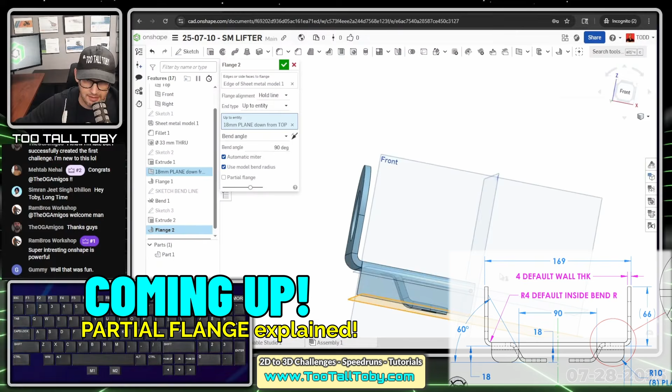And we can pick this 18 millimeter plane, so that way the flange goes right down to that plane. That's pretty sweet to reuse that plane. And then for the length of this thing, we're going to say partial flange. Now, the thing about sheet metal in Onshape with partial flanges is this distance by default is this distance here, which is not what we want.

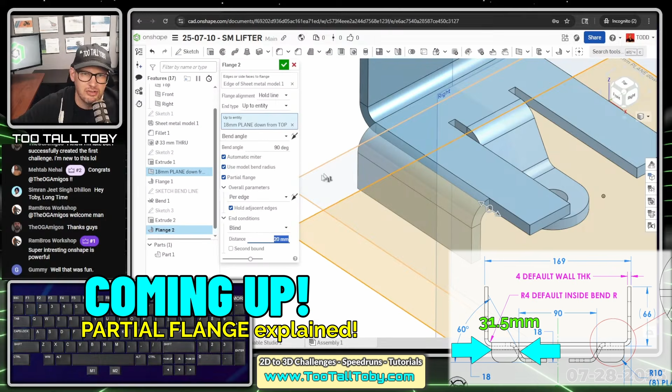So that distance there is 10. You'll see if I change that distance to 15 or 20, it increases off of that edge. So instead, what we want to do is we want to change this to end condition up to entity with offset. And then you just pick this point here where you want your dimension to begin.

So our dimension that's shown on the drawing there is 31.5. So if we make this 10, you can see it's getting bigger, 20, and then 31.5. I only did those increments so you could see what's going on with it. And then remember, in Onshape, you can pick both edges at the same time. So I can also pick this edge over here. So if I come back up.

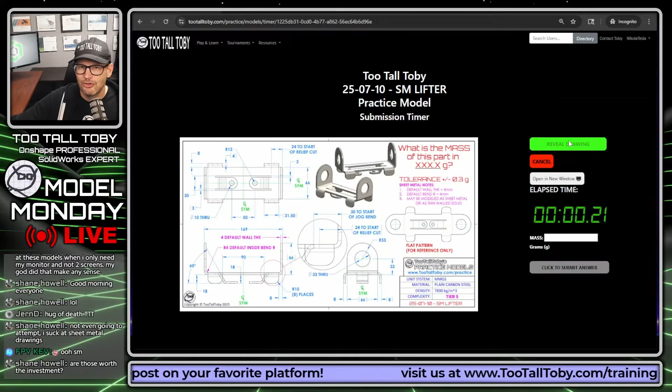So the question is, what is the mass of this part in XXX.X grams? And we're going to try and enter that mass right down here in the Practice Models app so that we can earn a point on the Practice Models leaderboard.

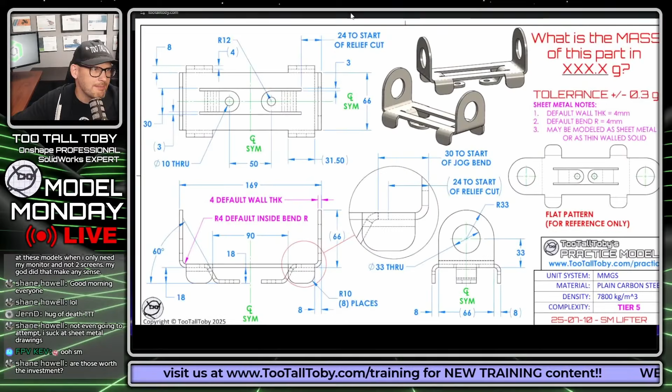So even though the clock is running, what I like to do before I get started in Onshape is I like to come up with a game plan as to how I'm going to model this part. We can see here that this part is a sheet metal model. And when you're working in sheet metal, one of the first things you want to look for is what your very first sketch is going to look like. In sheet metal, we can perform a function called sheet metal extrude.

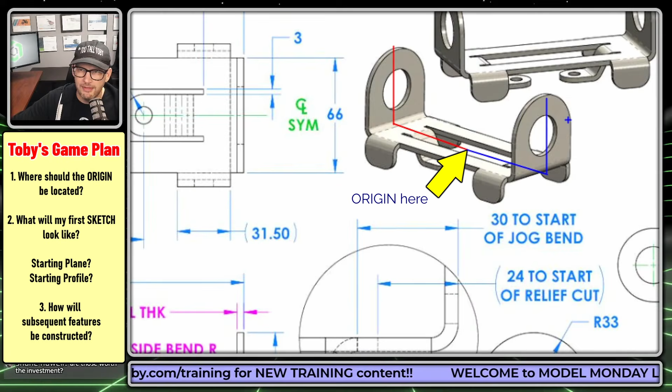So what that means is we could maybe start out with a shape like this, and then we could take that whole shape and extrude it, and then we could fillet off these top corners here. But the thing is, I don't need to do the entire model. I could opt just to do half the model.

So I think my very first sketch is going to be on the front plane. It's going to look like this, and then I'm going to fillet that shape off. I'm just going to do the sheet metal and extrude that out for half the model, and then I'm going to fillet that shape off. Then once I've got that shape filleted off, I'm going to punch this hole through the middle, and then I'm going to get to work on this shape here.

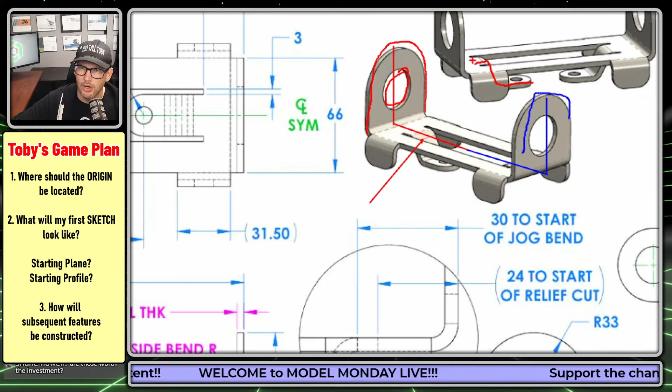There's a tab that comes over and down and over. But before I'm able to get that tab in place, I need to create the clearance for that tab. So there's a little bit of jog clearance, or they call it a relief cut here on the drawing. 24 millimeters to the start of that relief cut.

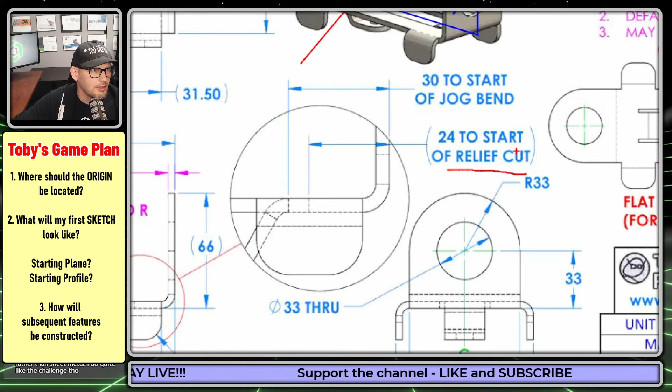Looking down on the top, you could imagine this is like a rectangular shape. But the thing is, the jog itself starts from a different location. You'll notice the relief cut starts at 24 millimeters, but the jog itself begins at 30 millimeters in here.

So maybe when I go to create that cut for the jog, maybe what I'll do is create the cut to look a little more like this. I'll come over, down like this, and then up like this, and come over, so that I begin right away with the starting point at 30 millimeters for that jog, for that flange that's sticking down. And maybe that'll save me the extra step of having to create a sheet metal tab.

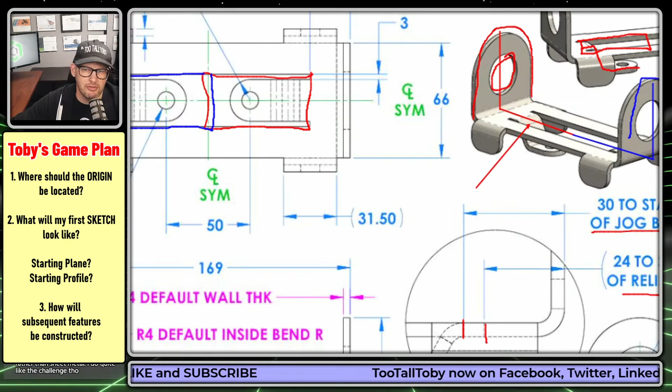Then we get into probably the most complicated part of this design, which is going to be creating this jog that comes down here at 60 degrees and then comes back over at another 60 degrees, or 30 degrees, however you want to say it. So we need to create that jog shape, and it needs to go down to exactly 18 millimeters.

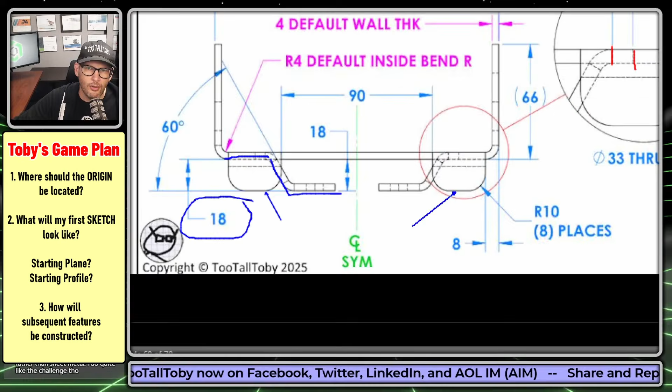I think what I'm going to do is create a plane that comes down 18 millimeters, and that's going to represent the absolute floor, because that's also the bottom of these little tabs here that are sticking out on the side.

And then when it comes to creating these tabs, we'll talk a little bit about Onshape sheet metal and how you can control the length of your flange, and we'll finish up with a super secret shortcut on how to fillet off those corners. So that is our game plan.

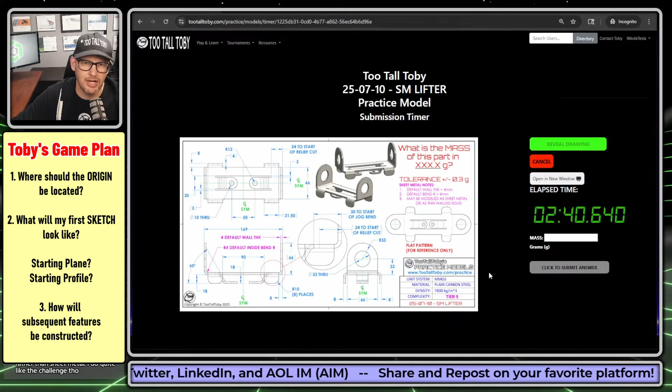So let's move this drawing over to our second screen so that we can model this up and see all of our dimensions. And let's bring up our copy of Onshape here so that we can work in Onshape. And let's bring up our keyboard cam as well, so you guys can see all the cool keyboard shortcuts I'm using.

Now remember, over on the left, we've got some live chat. We've got some people over there in the chat that are also trying to model this thing.

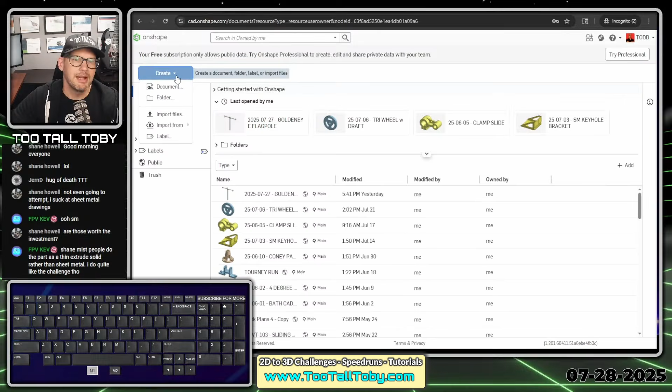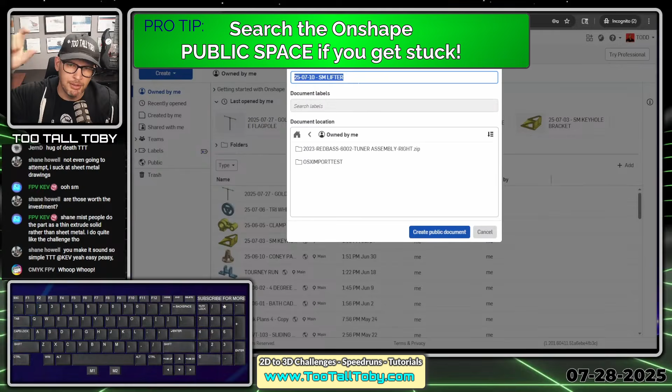I'm going to say create document, and I'm going to name this document 25-07-10 SM lifter. And the thing that's cool about Onshape is that I am going to store this in the public space. So here's the public space, and that means anybody with an account on Onshape can go into that public space and search for this text string, and then open up my model and poke through it in case you're coming up with an incorrect mass.

So I'm going to say create public document, and the first thing I always do is just take a look at my workspace units. Now my default workspace units are millimeters and grams, so I'm pretty confident that I'm in the correct units, but just in case you didn't know how to do it, you do it up here in this hamburger menu.

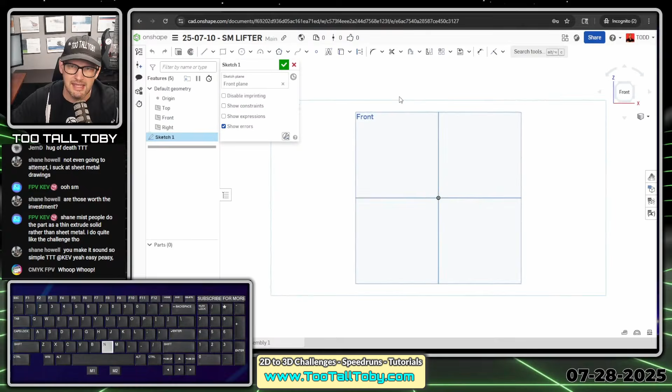So once we set our workspace units, front plane, S key, begin a sketch, N key to get normal to, L key to begin the line command, single click, move my mouse over about 169 over 2, move my mouse up here about 66, and then I'm going to hit escape and press the L key and create a line here, and this line is going to be a construction line.

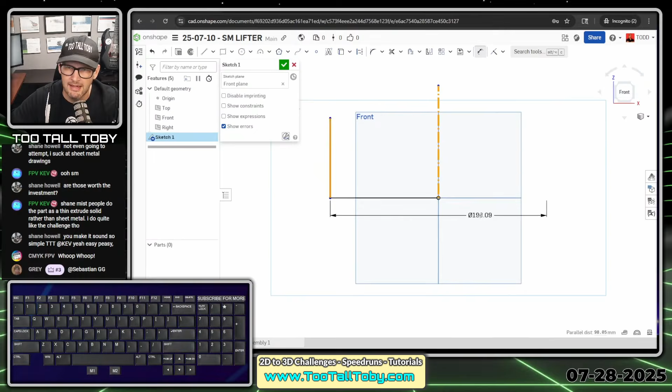What that lets me do is create a dimension here, a key dimension, that goes from this line to this line, and then I can cross over that line and make that distance 169. So even though I'm not doing a revolve, I'm doing a mirror later in the model, this is a great way to get doubled dimensions.

So now for the height of this thing, I could add a dimension here from the base up to this point, and make that height 66 millimeters.

But I thought this would be a great opportunity to just talk to you for a minute about Variable Studio, and you'll see why in just a moment. I don't want to go too in depth on this topic, but I am going to create a Variable Studio here. So I'm going to get rid of that 66.

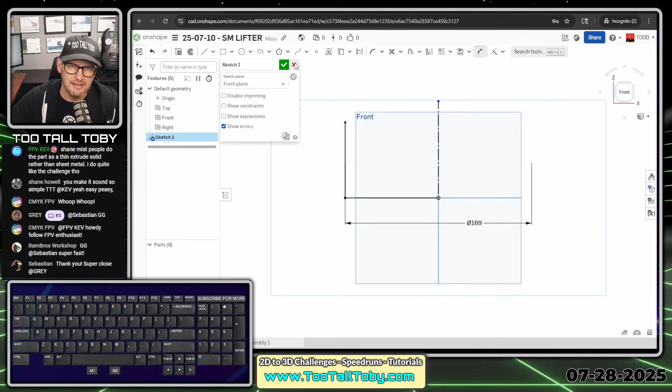I'm going to exit this sketch, and come over here to this panel on the right. Once I click on that panel, I'm going to click down here at the bottom, Insert Variable Studio. This lets me create a dimension like width. I'll call this one width, width of base.

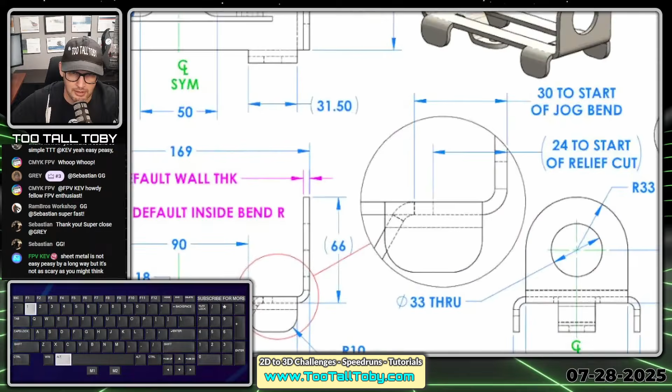And then over here for the length, I'm going to input the width of the base at 66 millimeters. So what that 66 millimeters is, sorry, I misspoke here, what that 66 millimeters is, is this dimension here.

And the reason that's significant is because when I go to create this fillet here, this fillet is going to be 1/2 of this width here. And so by creating a Variable Studio, I can create links like that in my Onshape project.

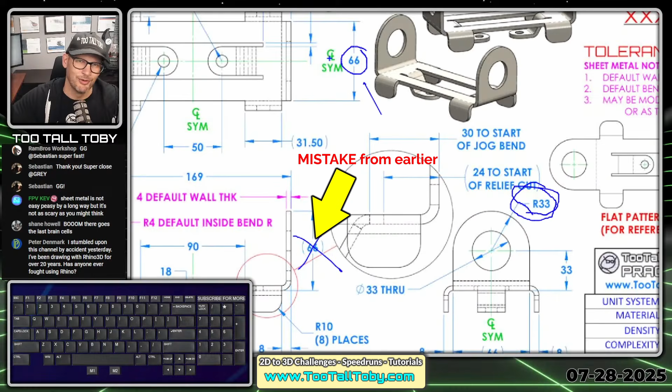I got a little ahead of myself, and I kind of confused this 66 with that 66. Just ignore that. I'll go back in and add that in the sketch here in just a moment.

But we are going to see that when I go to extrude, I'm going to reference that Variable Studio by typing in hashtag width, and then I'll get that width of base. And then when I go to input this dimension here, I'll type in hashtag width, and that one will be over 2. That way, if I ever change the width of this dimension, that fillet will automatically update, and I'll always get 1/2 of that distance.

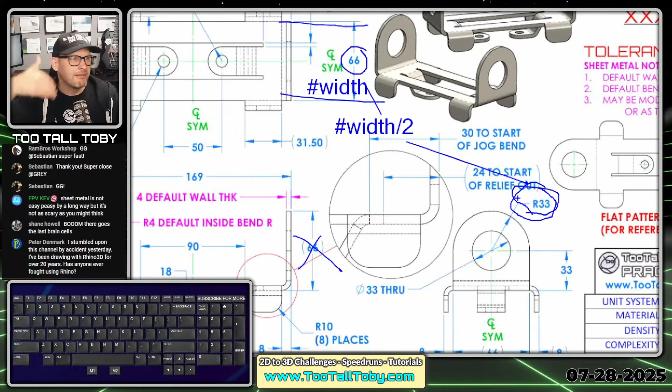Now, I know with a fillet, this could also maybe be a full round fillet, although full round doesn't always work the best in sheet metal. However, there are plenty of applications where you can extrapolate this skill and use it to save yourself some time.

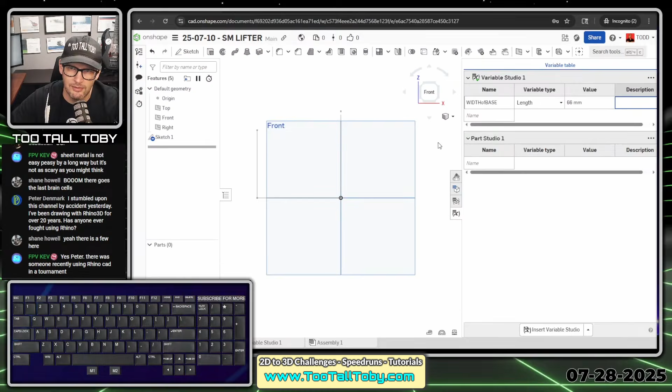So I've gone in here, I clicked Insert Variable Studio. In the Variable Studio, I created this width of base, and I'm just going to call that one length, or that dimension type is length, and the value is 66 here. So now what this means is I can go back into my sketch.

Like I said, this dimension here actually is a static dimension at 66. And now I'm going to go to sheet metal, extrude that. So I hit the green check mark, go to sheet metal model, and then this is going to be extrude.

And I'll pick on this line and this line. And then here for the depth, this is going to be hashtag width of base. So I can just press down and then press enter. And now that's going to become 66 for the width of the base. And I'm going to say that's going to be symmetric.

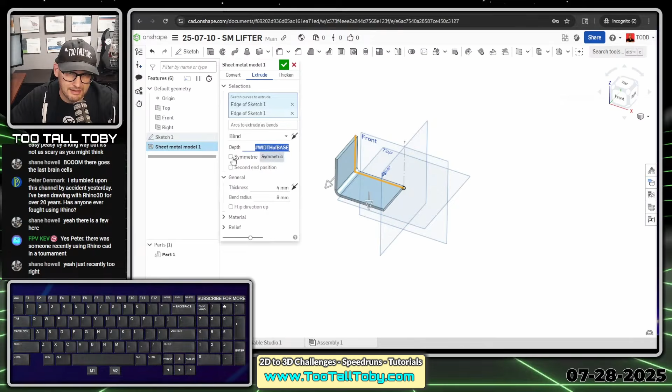And then I can press tab, get down here to my thickness 4, tab, get down here to my bend radius 4. That's shown on the drawing here. So note, default wall thickness 4, default bend radius 4, maybe modeled as sheet metal or as a thin walled solid. So we're going to do it as sheet metal, right? Because we're sheet metal pros here in Onshape.

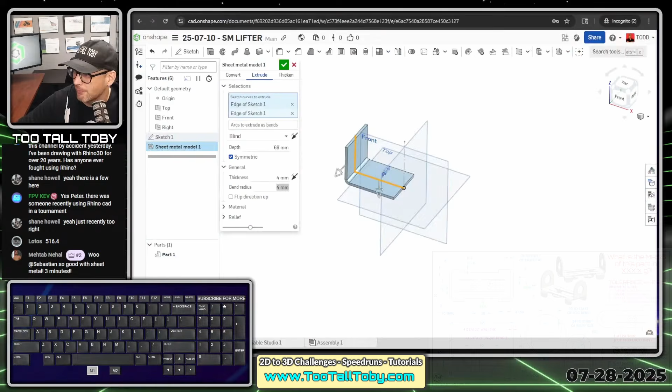So now that we've got our sheet metal parameters in here, the one thing I want you to note is I use tab a lot. I press the tab key to get to symmetric, press the space bar to activate symmetric, tab, get down to my thickness, press 4, tab, get down to bend radius, press 4. Awesome time saver in Onshape.

And then the final thing when it comes to sheet metal is you just got to make sure that your material is going to the correct side.

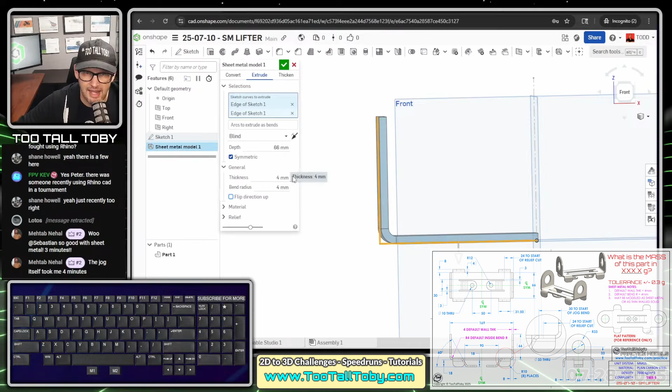So you'll notice here that I've got my direction of my sheet metal material. Make sure that that's going to the correct side. In this case, it's going to the inside because of how I dimensioned this dimension here at 169, and because of how that dimension is on the drawing. So we hit the green check mark and boom, there is our sheet metal.

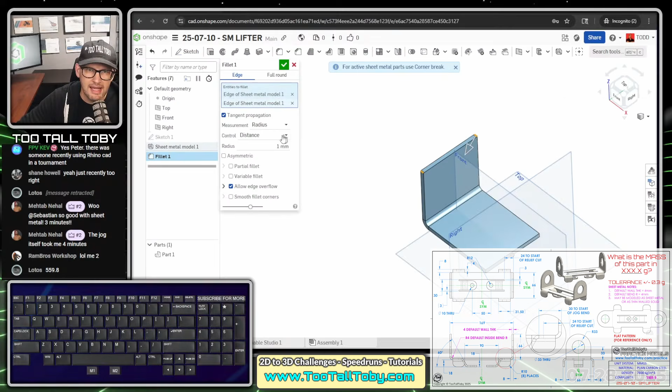Now we can do S key, fillet, and pick on this corner here and this corner here. Then for the radius of the fillet, we can type in hashtag width of base, enter, divide by 2, enter. Look at that, nice full round fillet based on the width of that extrusion. That is how you use a variable studio. So I can press enter there and boom, we are done with that full round running around the top of that part.

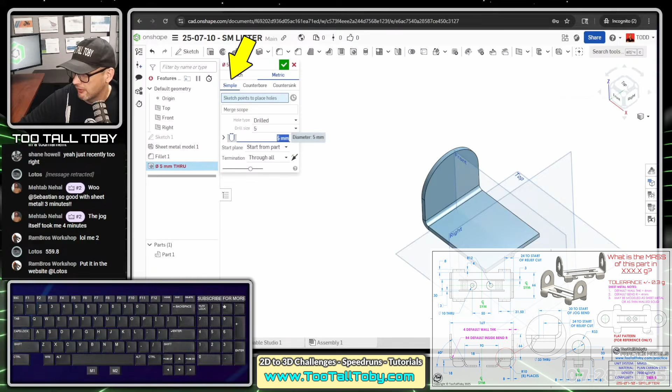Now we can go into the hole command and say we want a simple hole with a diameter of 33. Yep, 33. Then you can see here that we can align that hole using the select mate connectors option. So you click here, select mate connectors, and then you just kind of put your mouse near this edge and it'll wake up the center point of that edge. If you just get near that edge there, so there we go, and click, and look at that, there is our hole. Hit the green check mark, boom, we are done with that feature.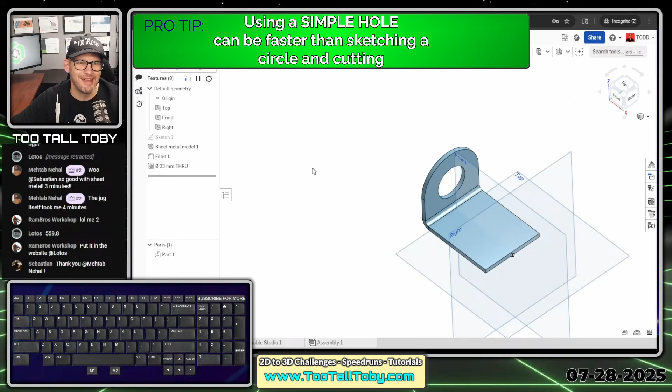So now we can click on this face here, S key, begin a sketch, and we're going to create that kind of rectangular cutout for our jog relief. So S key, rectangle, and we can create a rectangle here like so.

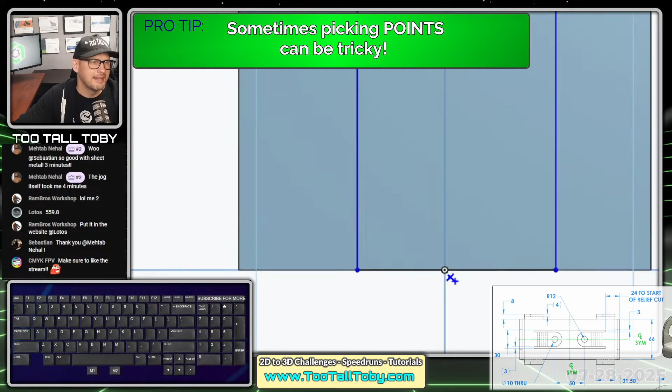Then we can say that this point here, the origin - I notice when you're trying to pick the origin, I usually hover right about here, so you notice I'm kind of down and to the right of the origin. If you put it right over the origin, a lot of times you don't get it - you get the line or the plane or whatever. But if you go just a little down and to the right, then you can left click and pick the origin, pick this, pick the line of the rectangle you want, and then Shift M, boom, midpoint.

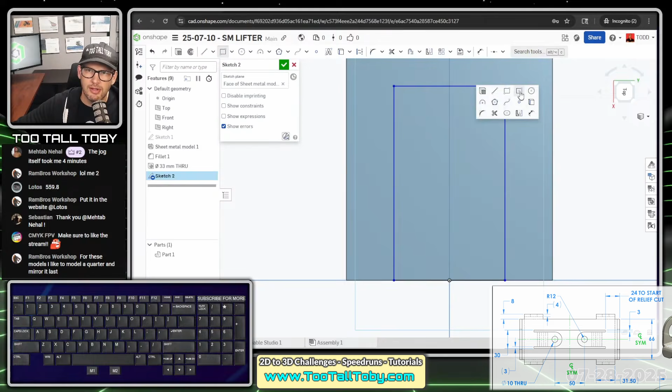Then what we could do is sketch a rectangle here. There's a couple ways we could do this rectangle. I'll probably just do it with a center point rectangle so I can get the vertical relationship here. So we create a rectangle here like so. Now that rectangle is going to basically have symmetry, both rectangles are going to have symmetry relative to one another and relative to the part. So you'll see if you hit escape and then grab this one, it behaves symmetrically, and this one behaves symmetrically as well.

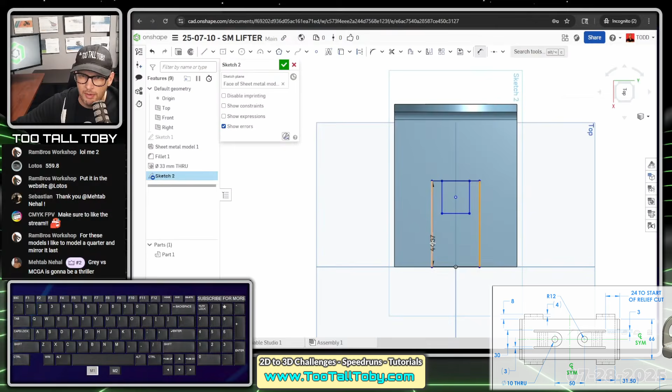So that sets us up to add in our final dimension. S key dimension, the width of that slot is 30. The width here to the clearance is 3, and that should get it for both of them. The location to the cut is going to be our first dimension, which is the 24 location to the cut relief. And the location to the beginning of the jog is going to be our second dimension here, which is going to be our 30.

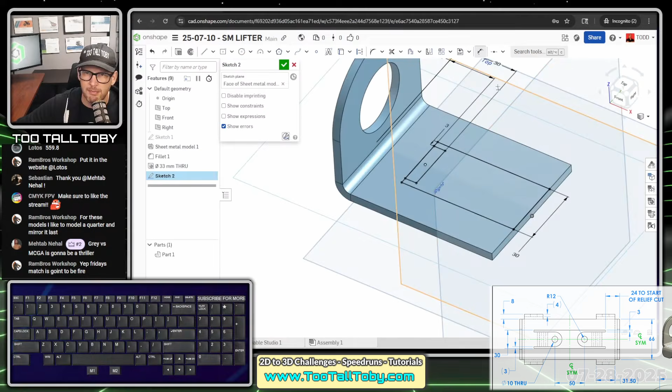So once we create that geometry, we're ready to jump into an extrude cut. S key extrude - oh sorry, let me go back to my top view. This is what that sketch should look like if you're following along with the tutorial. I kind of changed that view pretty quick. This is probably what you want that sketch to look like if you're following along.

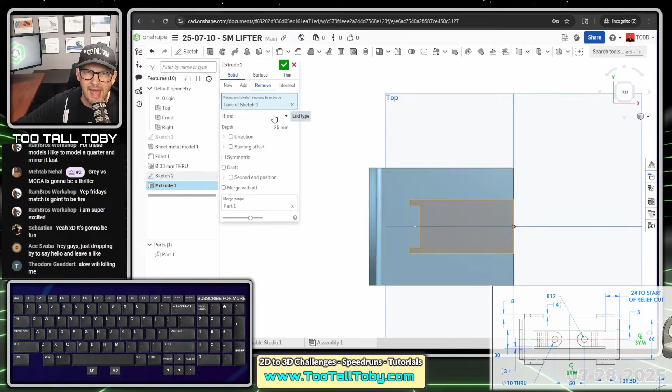So now you can see that I can go into S key extrude, and this is going to be an extrude cut. I'll hit the space bar to clear my selections, then just pick this region here, and that is going to be either up to next or through all. Either one will work - I usually just do through all if there's nothing behind it. So that gives you a great start for your jog that's going to end up coming down. Now, both the jog that's coming down and the tab that are sticking out here, both of them kind of go to this absolute floor location at 18 millimeters.

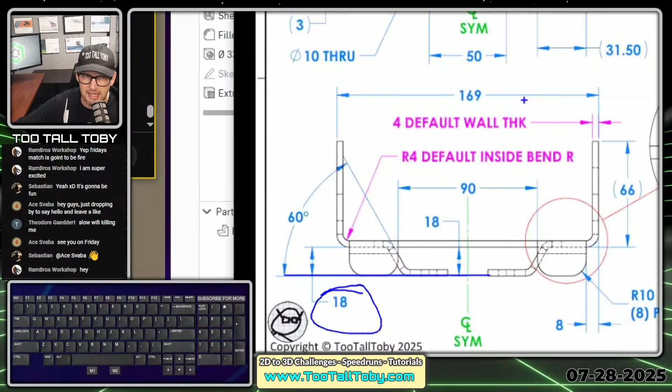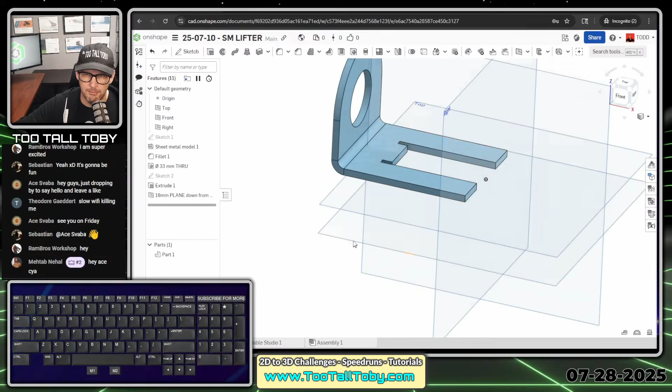So I think what I'm going to do here is create a new plane at 18 millimeters down from the top plane. I'll click on the top plane, press S key for plane, then tab 18, enter, and flip the direction of that plane so it's going down, enter. I could call this one either absolute floor, shift N, or 18 millimeters plane down from top. Either one will work, but now I know that plane is important. So there we go, we can see what that plane looks like.

Now to create our jog, we could do it in two ways, and I'm going to show you both because I think they're both valid. The first one is I could take this edge here, go to sheet metal, then flange, and bring a flange down. Let's make the angle first, so I'll make the angle 60. Then I'll bring that flange down to a distance of up to entity, and you'll notice I'm going to pick on this plane.

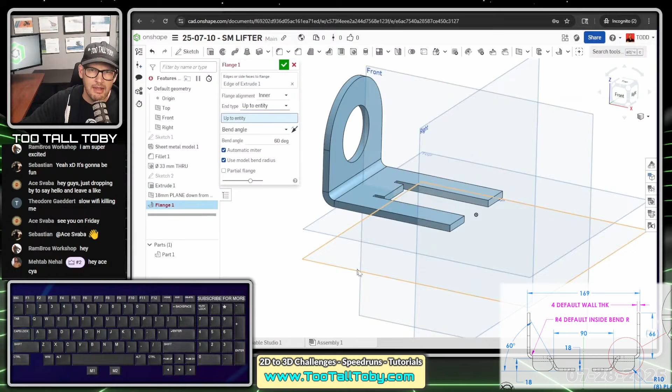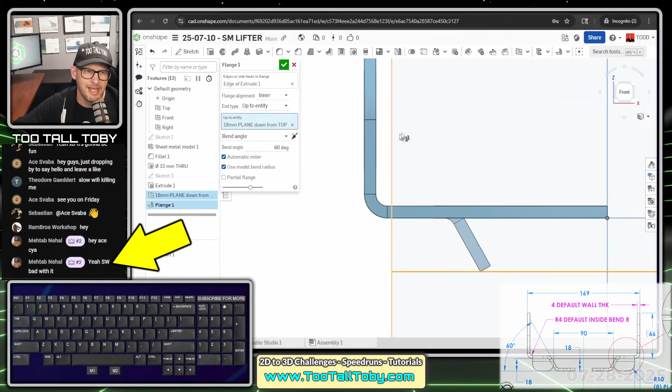This is something, especially for you SolidWorks users out there, that does not work well in SolidWorks. When you have a sheet metal flange going at an angle and then try to reference it to something else, SolidWorks always seems to struggle with getting the length correct. It's almost like it calculates the projected length, but not the length on an angle. But you'll notice Onshape has no problem, it just comes right up to that plane the way you would expect. Mehtab in the chat says yeah, SolidWorks is bad with that. Yeah, I've had to come up with many workarounds to get that to work in SolidWorks. I just wanted to point that out for all the Onshape users and SolidWorks users that are maybe getting ready to switch over.

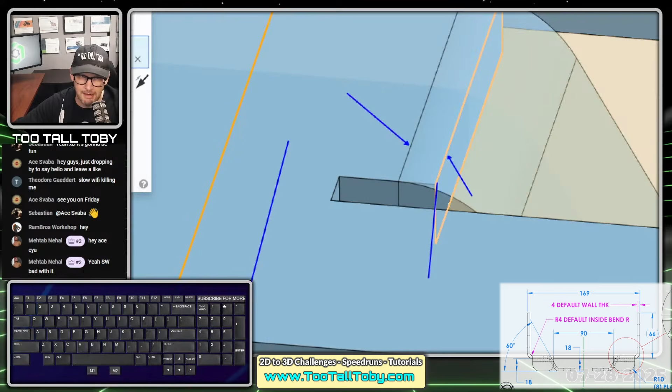And so that works really well. The other thing you got to be careful of is this is where the original 30 millimeter dimension was, and this is where the flange is currently beginning. So we adjust that using what's called flange alignment. If you want it to go to exactly where the geometry originally was, you use this one here, hold line. So hold line, that way it's starting just like it shows on the drawing, right there. We hit the green check mark and boom, there is our flange.

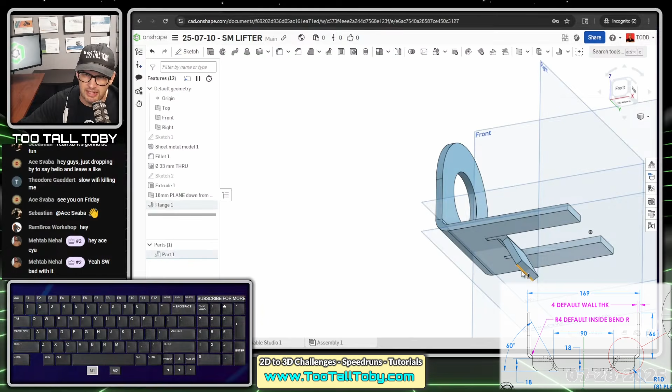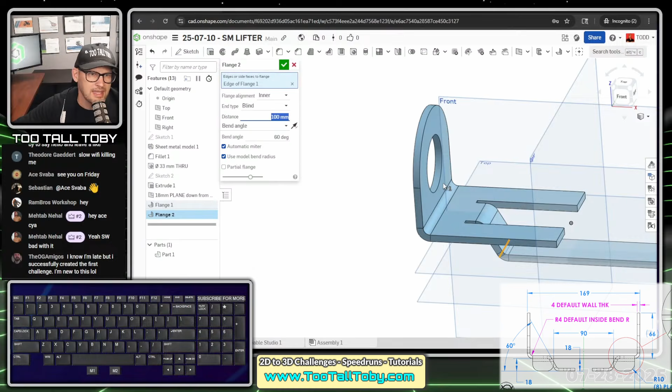Now for our second flange, we could pick this edge here and then do flange. You'll notice we're going to make this again at 60 degrees and we'll just flip the direction of that flange. And there we go. For the length of that flange, for this example, it's kind of arbitrary, you'll see why in a moment. Let's just say I make that 100, a random amount. And again, in the second half of this flange definition, I'll show you how I got that, or what I'll do with that, how I'll cut that off.

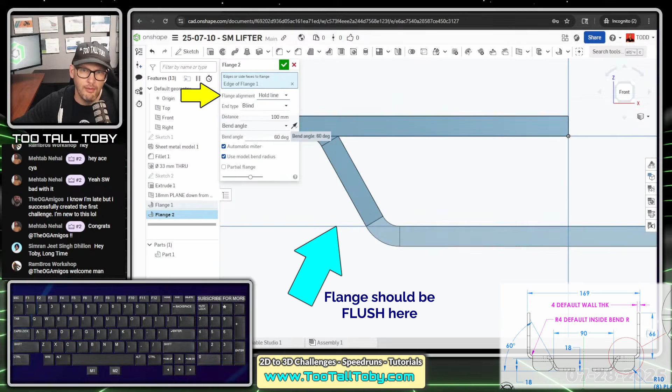What we'll do is go in and cut off this shape here with a little half circle and then a hole going through it to create the lower part, but we're not there yet. The one thing I want you to notice here is that because we created this plane down below at 18 millimeters, at absolute floor, we don't even need to necessarily know what each of these options does for flange alignment. We could just guess, like inner, outer, middle, hold line - which one looks like it's got the flange exactly on the floor there? To me it looks like it's outer. So if we just go to outer, boom, we got ourselves a flange that's right there on the floor and we are good to go.

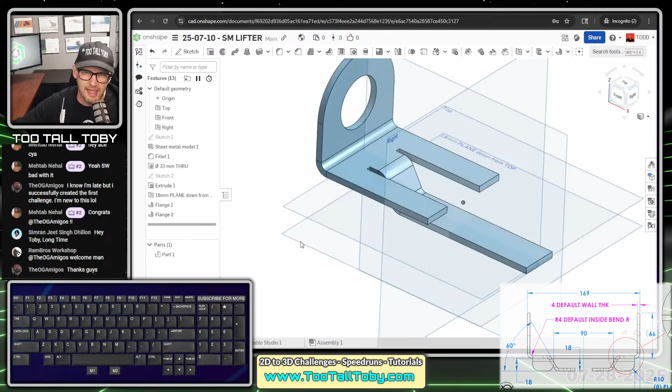So that's kind of a cool way of using that plane as a reference. And then we can also use that plane when we go to create this flange that's sticking down here, the little leg that's sticking out on the side over there. So that's method one, do it with two flanges like shown there. Method two is we could do it with a sketch bend, and I really like this one. So I'm going to go back to flange 2 and delete it.

Now, flange 1 is pretty good as it is. I'm just going to change the length of flange 1. So instead of going up to entity, I'm going to make it blind and make it 150 — just an arbitrary amount for that distance. See, it's sticking way down there. So then I'm going to hit the green check mark.

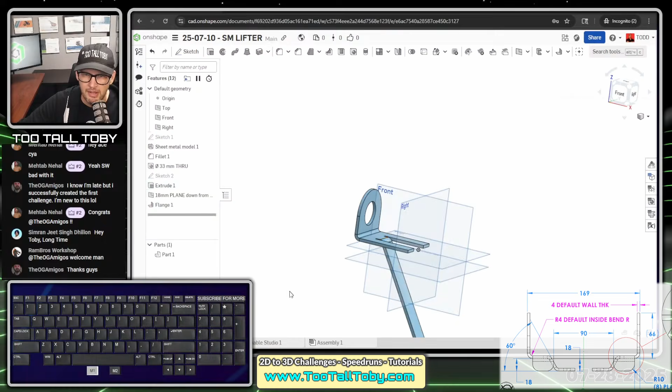And now I'm going to create a new sketch here on this plane. Remember, this is our plane that is the 18 millimeter floor plane. So begin a new sketch there on that 18 millimeter floor plane.

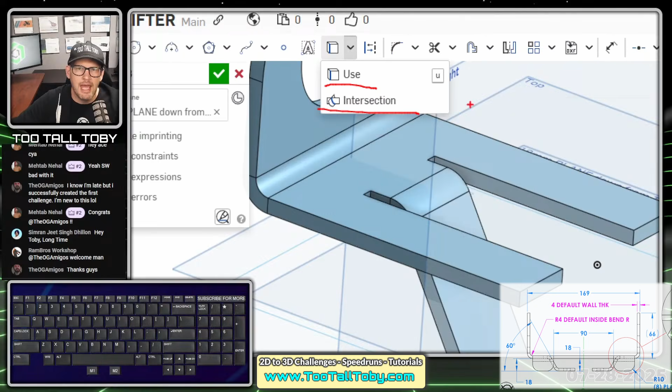Once I begin that sketch, I'm going to use a command called intersect. It's found underneath the use command — use, then intersection. What this does is it lets us create a line wherever this face, which I'm going to pick, is passing through the sketch plane. So I'll do intersection and pick this face, and look at that — Onshape adds a line exactly where that 18 millimeter plane is passing through.

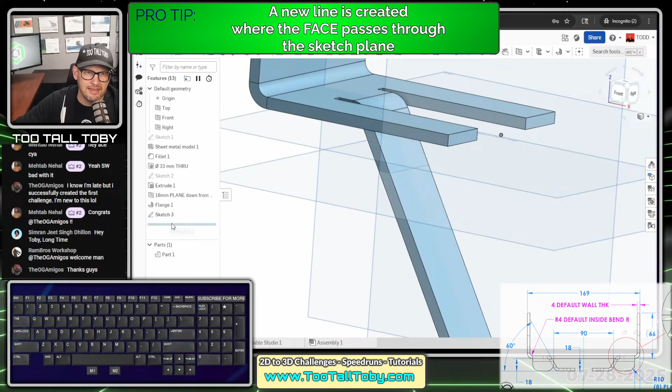Now that I've got that sketch there, I'm going to exit that sketch, and I'll rename it to sketch bend line. Then I'm going to use that sketch with the sheet metal command bend.

By clicking the background, if I go in here to bend, I'm going to pick the bend line, this sketch here, and then for my sheet metal face to bend, I'm going to pick this face here. And look at that — now we're basically right back to where we were with the 2 flanges.

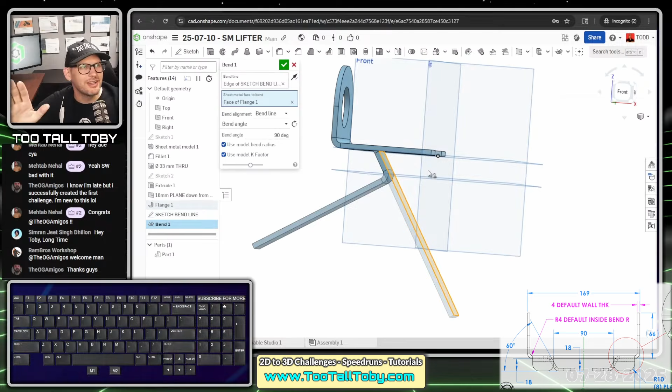I just wanted to show you guys 2 different methods, because if you're learning sheet metal, it's good to know as many different methods as you can, since they will all come in handy at some point or another.

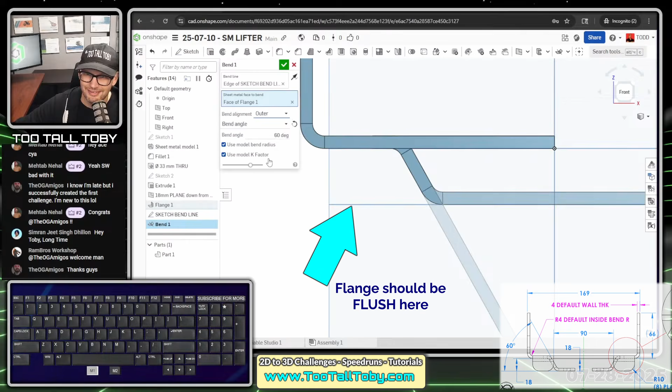So we'll change this to 60 degrees for that bend. We'll change the direction of the angle, the opposite angle, and we will adjust the bend alignment — bend line, hold other line, inner, outer, and middle. So where do we want this one? We want this one on outer as well. And there we go — we hit the green check mark, and boom, that takes care of that geometry.

So now the only thing left to do is clean this up with a cut extrude. I'm going to pick this face here, S key, begin to sketch, N key to get normal to. I'll create a rectangle like so, and then create a circle at the midpoint of that rectangle — that circle will have a diameter of 10 millimeters, and then another circle like so.

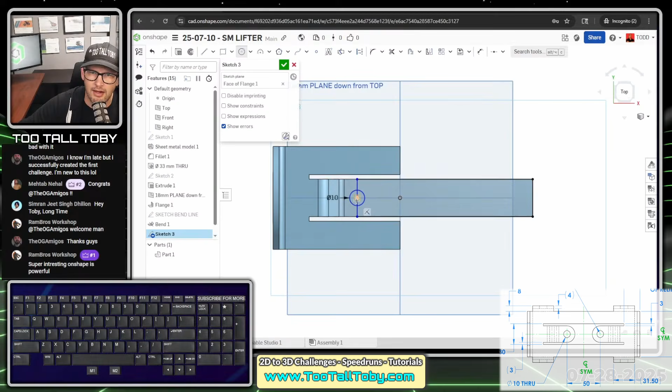Then I'll create another construction line, from here to here. We'll say that construction line has a distance from the center of the hole to that construction line crossover to get our double dimension of 50 millimeters.

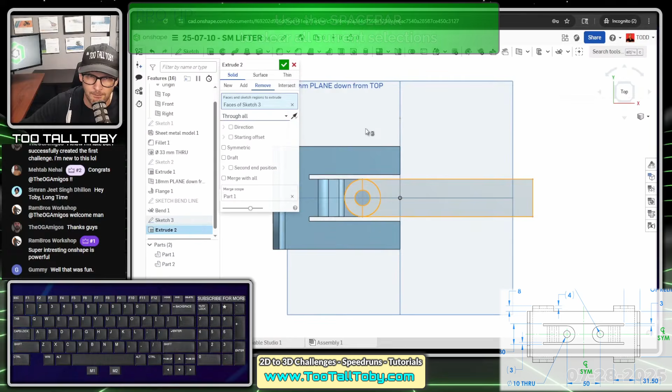Then we can go S key, extrude, and this is going to be a remove, and we'll do this one through all. Then we'll say we want to just hit the space bar so it clears everything, and we want to get rid of this, and this, and this. And boom, look at that — that is looking good.

So now the final thing we need to do is just add that tab over here on the outside. We pick on this tab here, and we go to our sheet metal command for flange. The thing about the sheet metal command for flange is, once again, we have to take a look at where the flange is beginning. We want it to begin right here.

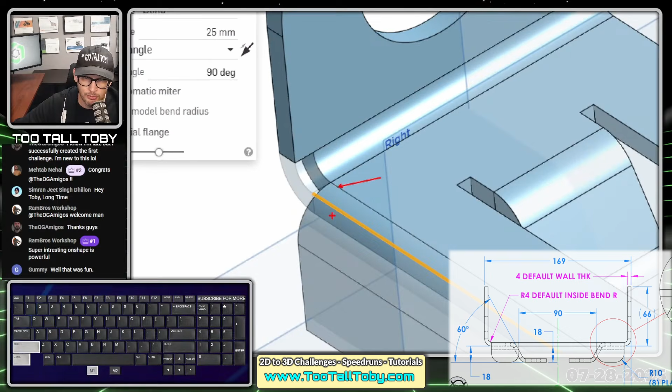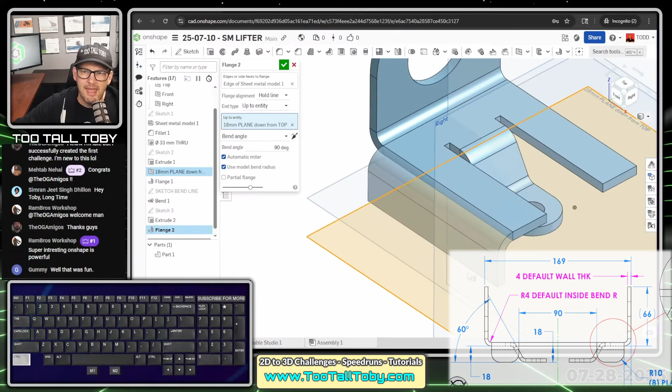So that is going to be hold line — hold line is original geometry, so the original edge, that's where we want it to begin. We fly out this menu here, we say hold line, boom, now it's using the original geometry. For the depth, we could say we want that to go up to entity, and we can pick this 18 millimeter plane, so the flange goes right down to that plane. That's pretty sweet to reuse that plane. And then for the length of this thing, we're going to say partial flange.

Now, the thing about sheet metal in Onshape with partial flanges is this distance by default is this distance here, which is not what we want. So that distance there is 10. You'll see if I change that distance to 15 or 20, it increases off of that edge.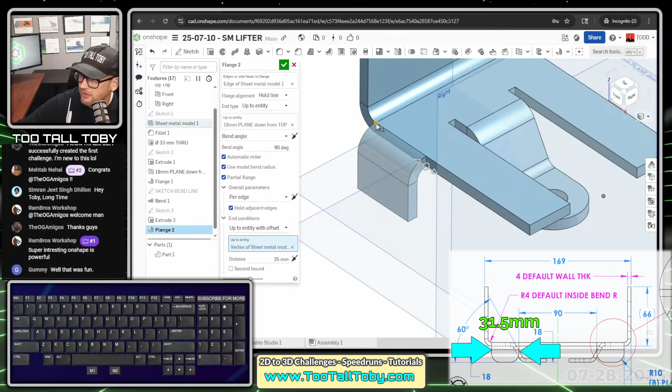Instead, what we want to do is change this to end condition up to entity with offset, and then just pick this point here where you want your dimension to begin. So our dimension shown on the drawing there is 31.5. If we make this 10, you can see it's getting bigger, 20, and then 31.5. I only did those increments so you could see what's going on with it.

And remember, in Onshape, you can pick both edges at the same time. So I can also pick this edge over here. If I come back up to this box where you pick your edge for the model, I could pick this edge over here too, and look at that, boom, we get both of them at the same time.

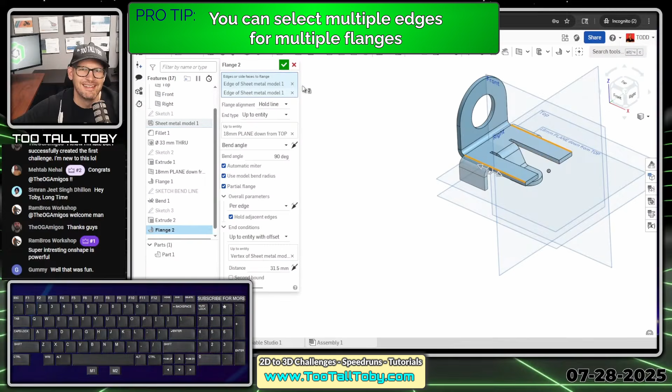Oh yeah, that's good. And then finally, the top secret filleting shortcut here. When you're doing fillets, you can do a window select and get all the fillets that are in a row. That's a good shortcut to remember.

So you can see here, we've got these 2 edges here. So I go S key, fillet, tab, tab, tab, make that 10. And then I put a little window here, and oh yeah, look at that. We get both of them.

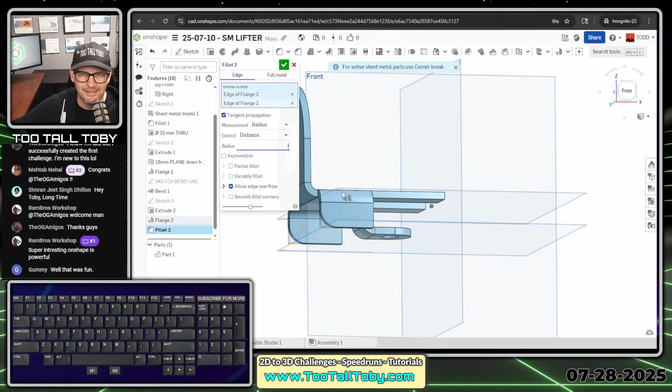We like that one. And so we can do the same thing here for the, that radius is going to be 10. So we can do the same thing here for this other one, window, that guy there. And oh yeah, that looks good. And there are our fillets.

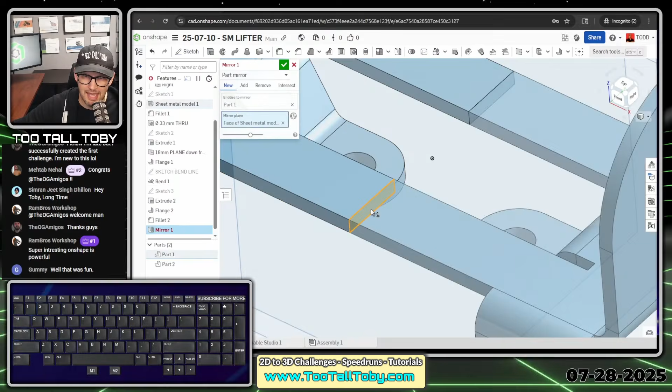So to finish this thing off, we'll use our mirror shortcut that we learned a couple of Onshape tips ago. Pick that face, S key, mirror, tab, pick that face again, and then just choose add and hit the green check mark. And then we can go over here to our part 1, right click, we can say assign material.

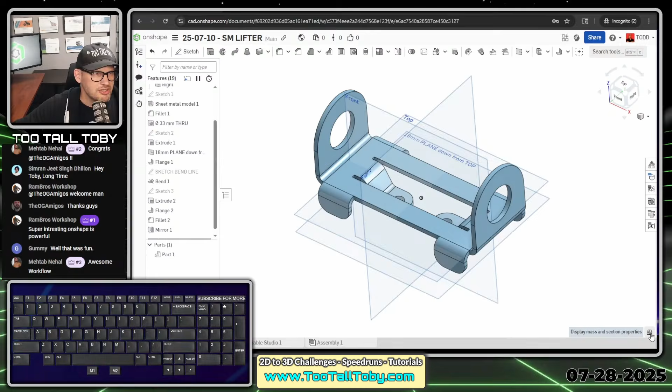And we're going to assign the material from the Too Tall Toby custom materials library, making sure that you're using the correct material here, plain carbon steel. Then we go down here to our section and properties, mass and section properties. Click on that, click on the part, and we are coming up with a mass of 559.69 grams, or 559.7 grams.

So let's go back to the Too Tall Toby app here. The timer is still running on this app, 21 minutes.

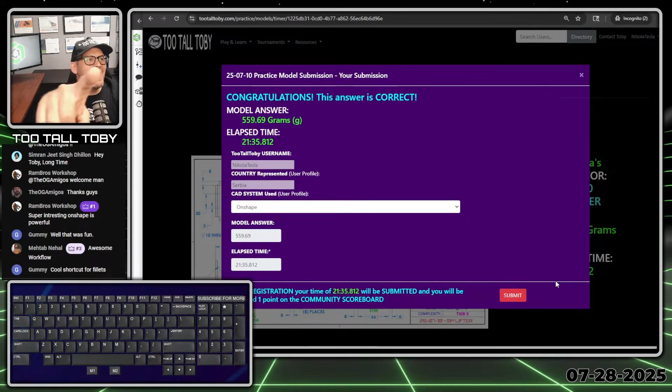Let's see if we got it correct. Wait, what was it again? 559.7? I think that's what it was. 559.69. Enter. And oh yeah, we got it correct. Whenever we see that purple screen, that lets us know that we got it correct.

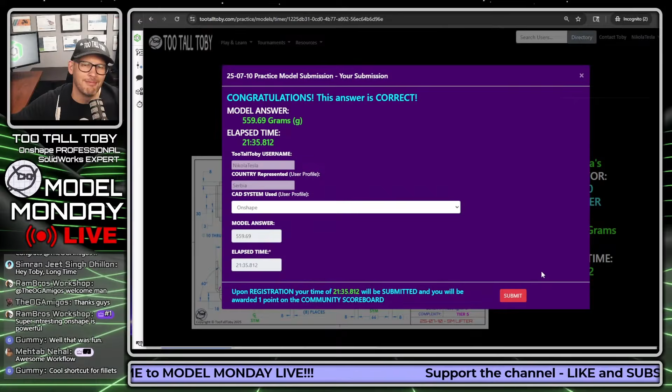So congratulations, this answer is correct, and that is your sheet metal live solve for this episode of Model Monday Live. Remember, you can always join us on Model Monday Live to take these challenges yourself and see if maybe you can model this thing faster than me.

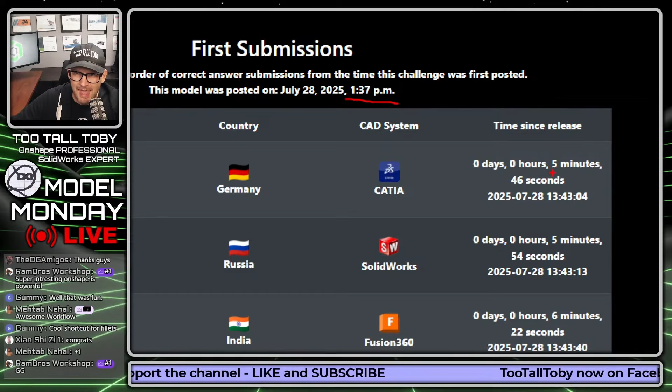So we can see that this model was originally posted at 1:37 p.m., and within 5 minutes and 46 seconds, it was none other than Sebastian MCGA from Germany who finished that model using CATIA. And whoa, look at this, a little bit of foreshadowing.

This Friday, we're going to see Sebastian go up against Grey in our CAD vs CAD tournament. And Grey was our number 2 finisher here in 5 minutes and 54 seconds. Wow, guys, less than 10 seconds apart from each other. Wow, wow, wow. That is some speedy modeling.

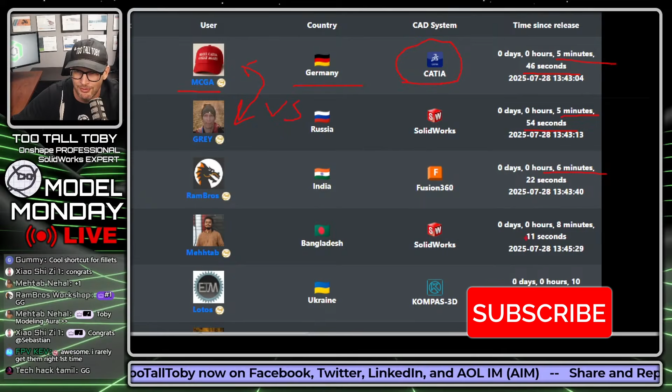RamBros Workshop, our world champion of 3D CAD speed modeling, finishing in 6 minutes from the time it was posted. Mehhtab finishing 8 minutes. Lotos 10 minutes. Wow, you guys are so speedy.

EcoStang is here in the live stream doing these challenges, 11 minutes using SolidWorks. Gummy, a fellow Onshape user from South Africa. What's up, Gummy? Finishing in 18 minutes. Well done. Dom, 19 minutes. And Libe